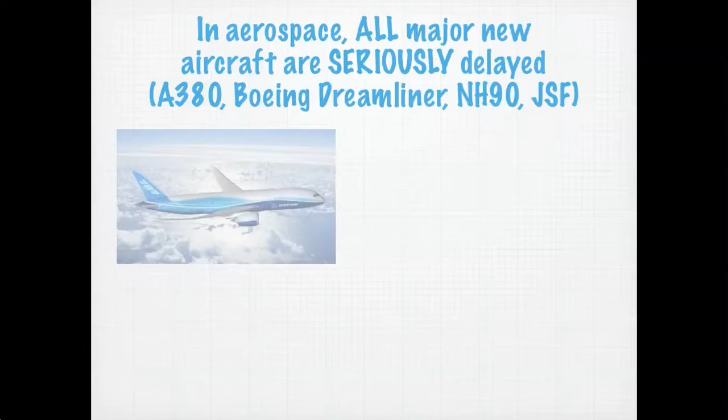Fair is fair. In fact, all major new aircraft have been seriously delayed of late. This is the Boeing Dreamliner, 3 years late. This is the Airbus A380, also 2 years late. The Joint Strike Fighter, or the F-35 as it is now called, or the NH-90, the military helicopter. All of these, the NH-90, do you know what the 90 stands for? Yes, indeed. So all these are seriously late.

So this program, the A380, is by no means an exception, which is interesting because these are truly, absolutely world-class companies: Boeing, Airbus, Lockheed Martin, the European industry. Just very briefly, and we'll see this later on in chapter 13 once more, the timeline, what happened.

So in around 2000, the program was launched, a big, huge plane, which was the top of the bill for the European civil aviation or aircraft industry, Airbus with its mother company EADS. In June 04, internally, and we only know this in retrospect, the first schedule delays become visible. In January 05, the first A380 is shown to the public. One was okay, but there was a handmade one.

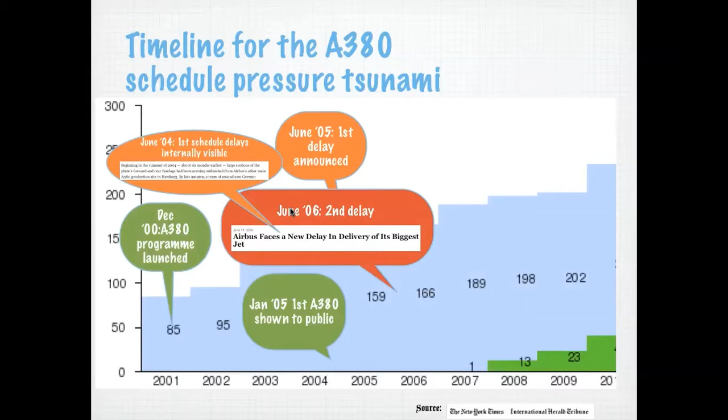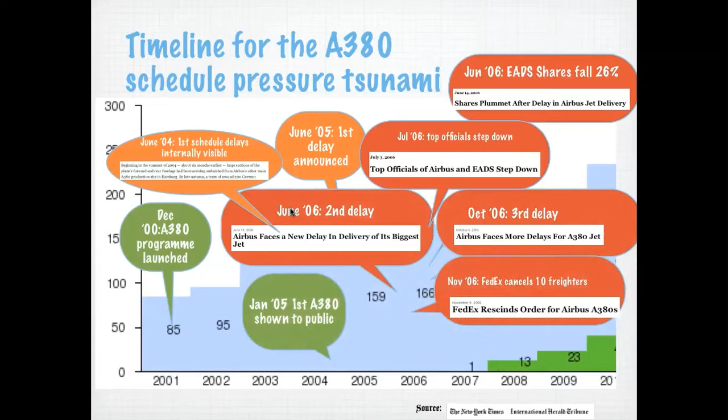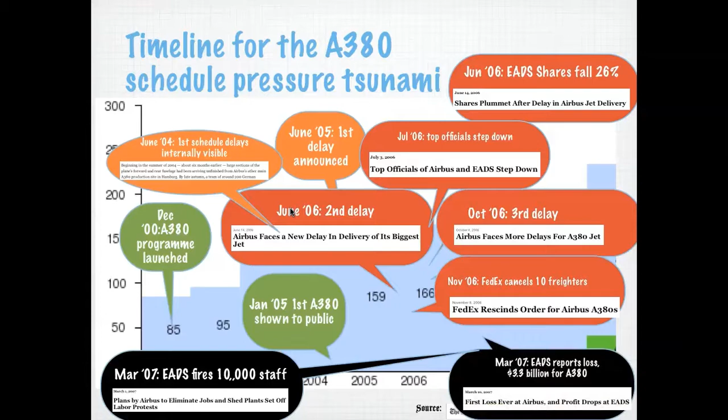In June 05, the first delay is officially announced, but in the year after that, the second delay is announced. And that really catches headlines. It leads immediately to a drop in share of 26%, to a step down of the CEO and the board of directors. And the worst was yet to come, because there was a third delay, and then you get cancellations from companies, and they had to fire 10,000 people in staff and lost a serious amount of money later on. So that's pretty much a horror story.

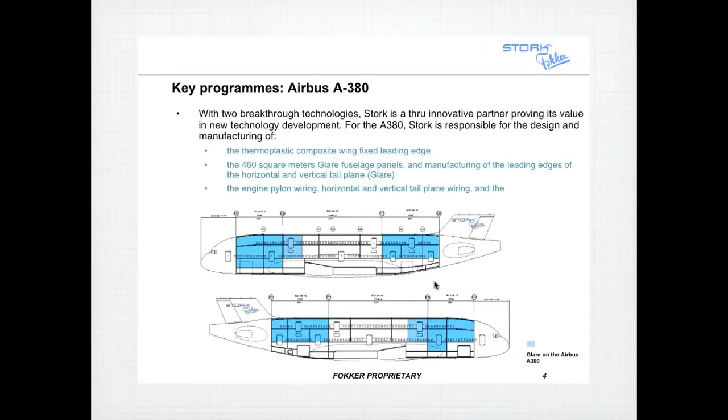The reason that I can tell you about this story is because one of the suppliers for the A380 was Dutch aircraft manufacturer Fokker, and they produce a number of things, amongst those a specific innovative material called GLARE, which was used for the fuselage, the outside of the plane. You could see the blue areas in here. And a couple of other things, and so they were closely involved, my friends and sponsors at Fokker, in this program.

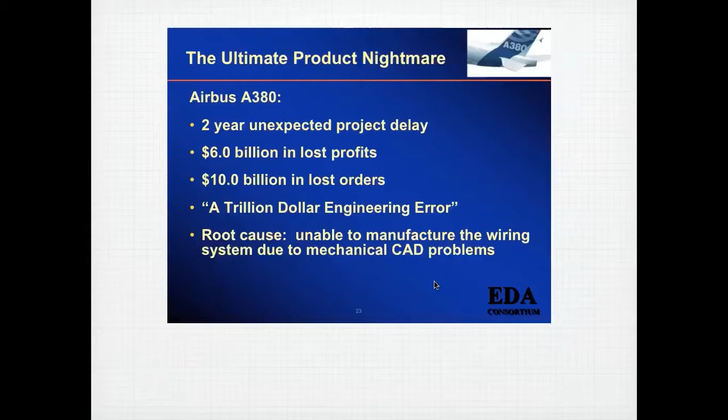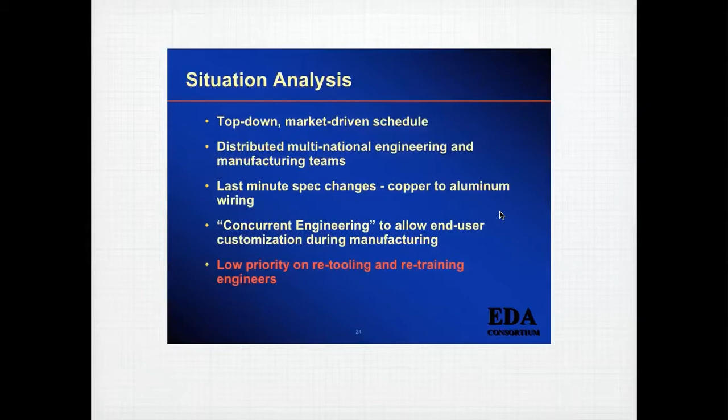So an ultimate product nightmare situation is a lot of last-minute spec, a top-down market-driven schedule. Market-driven you could read as unrealistic. Very distributed engineering manufacturing teams, the French, the Germans, the Spanish. All these have to work truly together. I wouldn't call this concurrent engineering, although it says there, it's between brackets. But at least what they did do was that the customer was allowed to fiddle with specific requirements. What I can agree with is that it's cost containment that drove some of the initial decisions.

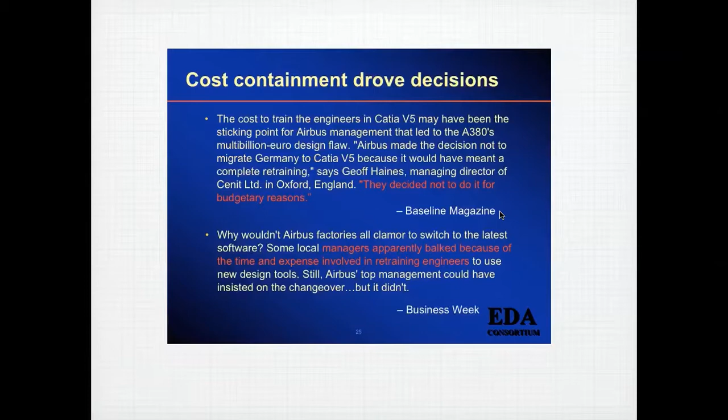One of the fatal flaws in retrospect is that the German engineers worked in CATIA, that's an engineering computer-aided design package, in 2D, whereas the French and the Spanish worked in 3D, and they did so because it seemed too costly to make the investment. And it also cost time to train the engineers. Well, that leads to, amongst many other things, no doubt, the problems we saw before. They try to work harder, but we already know from the capability trap that doesn't work. And that's basically the end.

So by now, most of these problems have been resolved. That means we are now many years later, and the A380 is sold repeatedly. But this remains a scar on the history of EADS, I suppose.